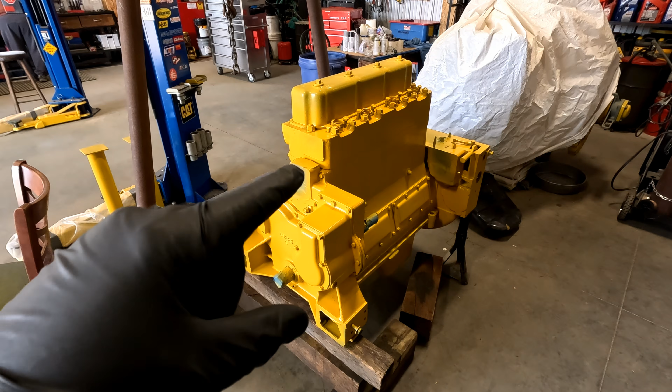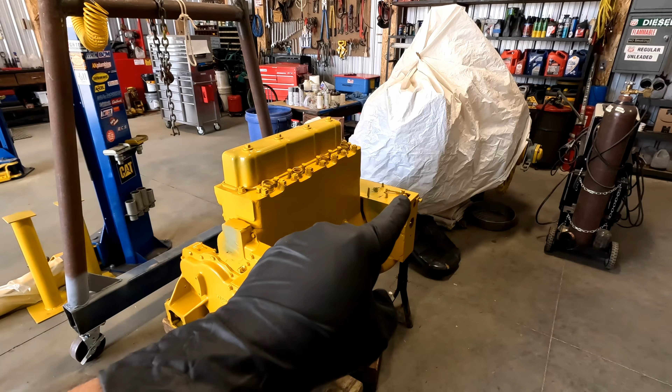We feel like we're seeing an end to our hard work with this engine build. We got a couple more accessories to do and put together up on the bench, and then we'll be well on the road to putting this on the rest of the tractor. Today, we're going to work on the lift pump and the fuel tower.

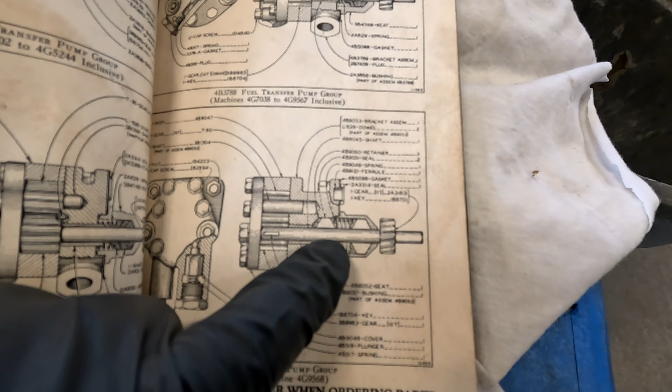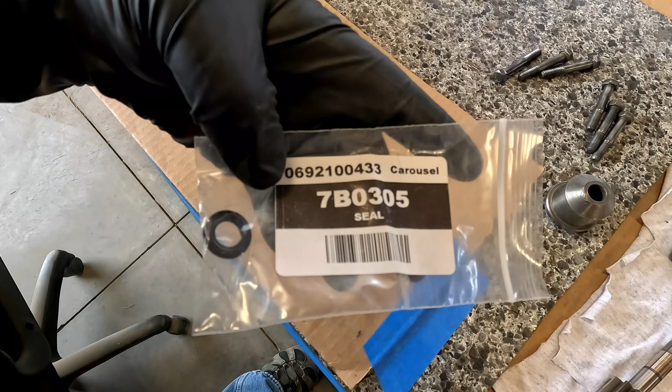We're rounding up parts because we're going to start on the lift pump first. I'm going to round up these seals first. It takes two of them. They're the 4B9051, and that's the packing that goes on either side right here. I need a 2A3314 seal. And that part's been upgraded to a 7B0305. We're just putting a few finishing touches with some Scotch-Brite and clean some of this stuff up. And we're ready to put this together.

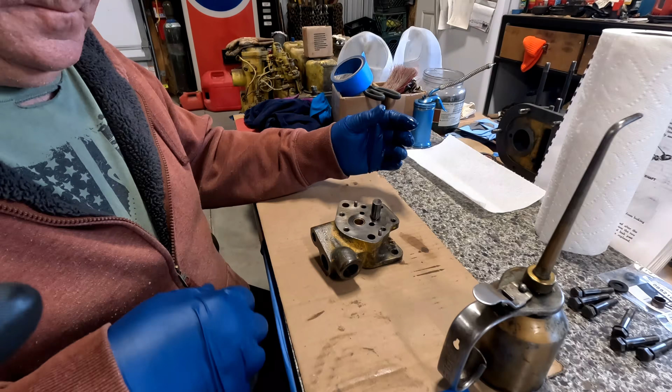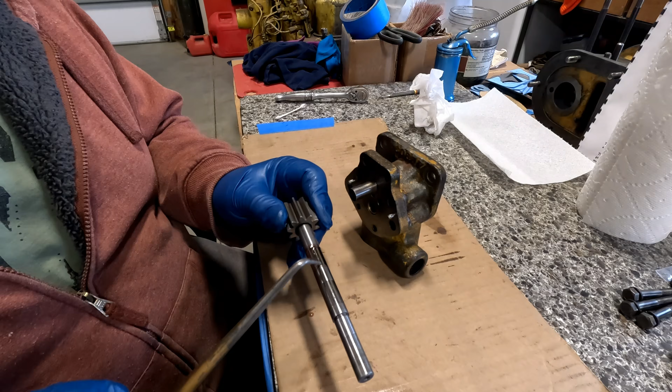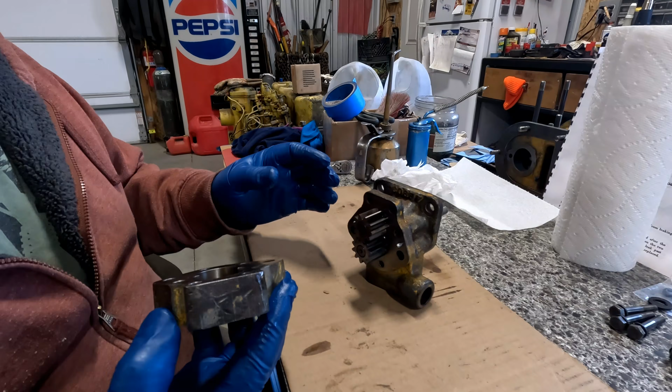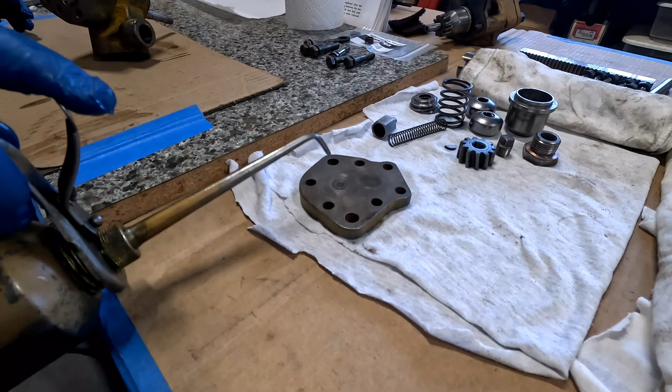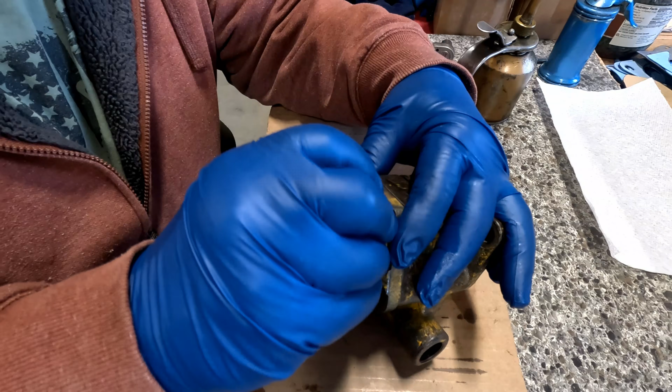There we go. What do you got next? Now the main body. And you can't reverse this. It's doweled in here, so it only goes one way. And there's no gasket in between it. These are a machine surface, and they fit very tightly. I put a little oil in those bodies. Now our cover plate. I'm upside down here. There you go. And a bolt. And we got new lock washers on all those. New split lock washers, grade 8s.

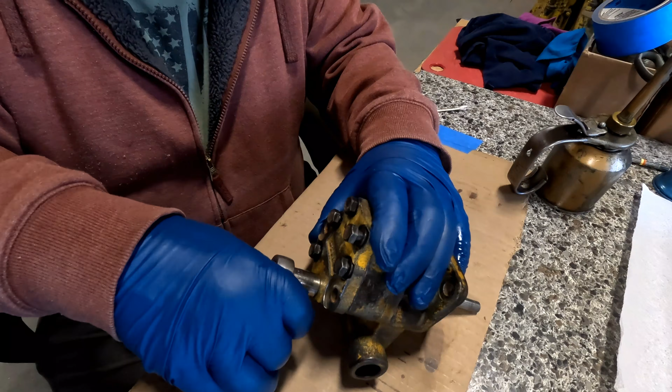And Dad's going to say that these are torqued by 1.5 grunts. Yeah. He's pretty good. He hits it very close doing it by hand. It's kind of become a competition we do.

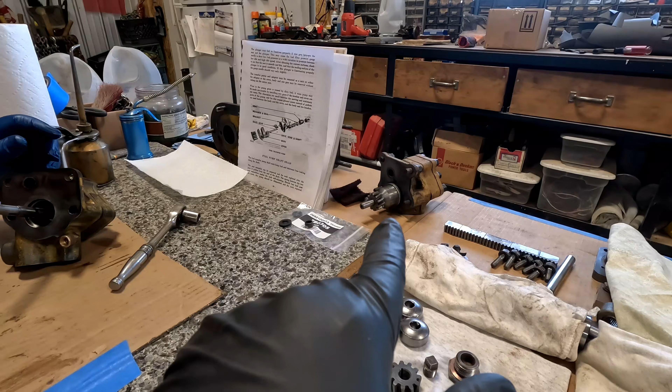Over here to the business end. Yeah. And this is where the packing and everything's going to go. Caterpillar had numerous different types of these lift pumps. And for example, this is 4G. That's off of a 7J. And you can just see how drastically different they are immediately. And even in the book, there's pages and pages of different lift pumps in here.

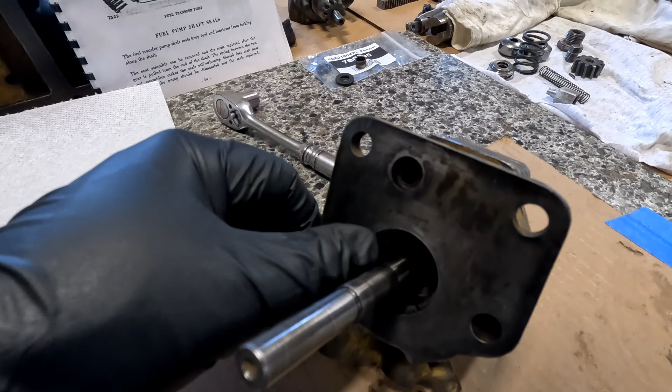We thought we had everything in order here, but we forgot to do something. This is a little bit of a complex part because this gasket we need to make here actually goes up right to the edge of this hole here. And this seats over the top of the gasket, like so. So that gasket will be right underneath of there. And to compound everything, this is kind of offset a little bit. So it's not in the center.

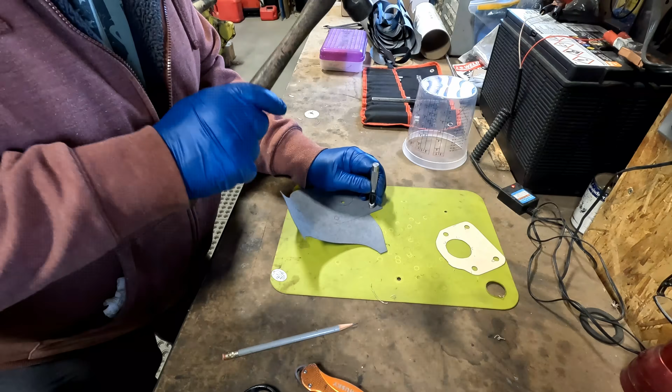So we forgot to make a pattern for this before we put everything together, but we're getting it. And we know we have another hole to do up here in the top, but we'll get that after we get it on the pump. I'm a little bit snug. Snug is good. We can always trim it.

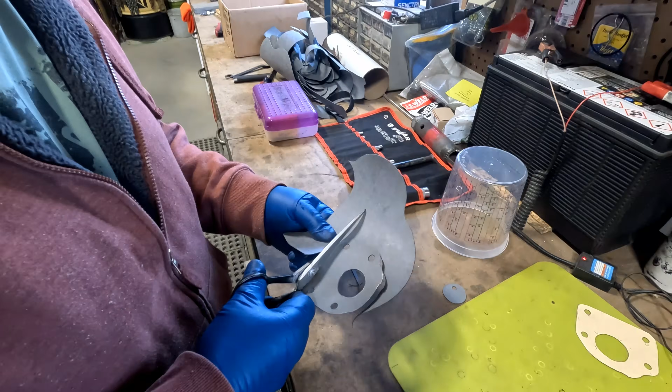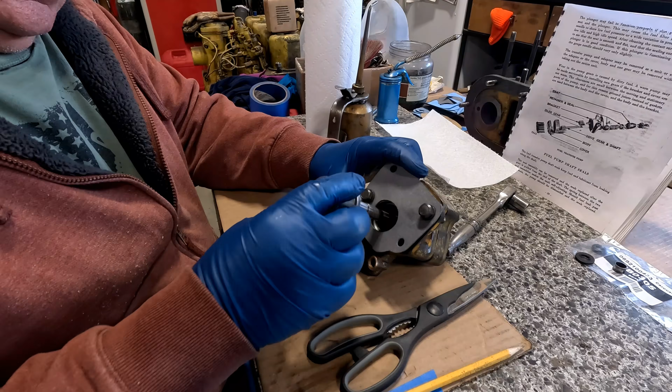It's Arts and Crafts Day here at LAOL. Yes. I think the art teacher would give you like an A-. Probably a B. A B? Yeah, maybe. Gonna work? I think so. It'll work. Fits in there nice and snug. I know Dad has three favorite tools at least around here. Number one being the torch, number two being the needle scaler, but number three is what? My favorite gasket making hammer. Yeah.

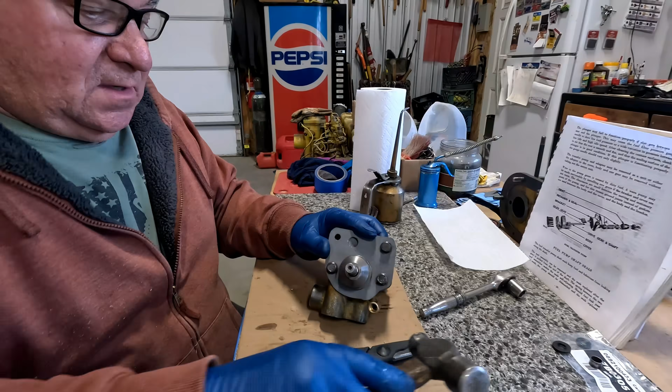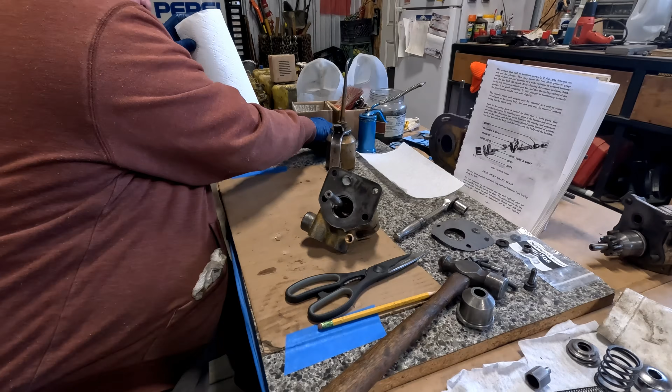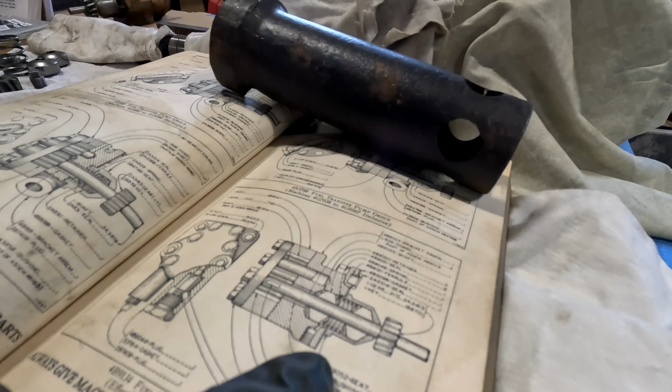Yep. Gasket goes next. And then everything else goes together because this has to go on the outside of the gasket. It actually shows that in the parts book here. Right here you can see that housing that comes out, and it actually dead ends right there, and then there's the gasket you can see right there. The retainer, that goes in there next, with the cup side up, just like that. And then your seal, which is kind of like a packing, goes on there next.

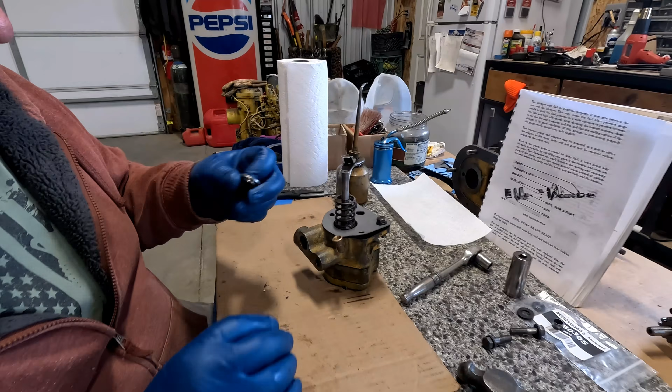And that's kind of... Yeah, that's going to be a little bit of a press fit. It's supposed to be tight. Yeah, it's tight. We might want to take a socket, and we're going to have to, I think... Well, we'll put this other retainer on there next, so we can push it on with that. There it goes. Next, the spring goes on, and then that cap with the dish upwards. Then we got another one of those seals.

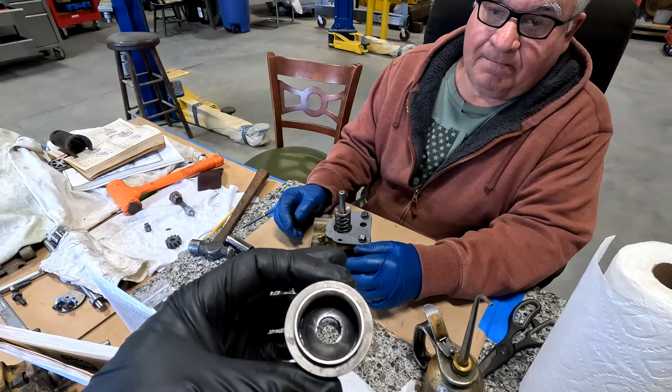Probably. And then our cap. Those seals and packings are self-adjusting. The spring keeps tension on them. If they start to leak, the book says to pull them out and replace them. What keeps tension on it is this collar, which will seat in this groove in the fuel tower right here, and that'll hold the tension on it.

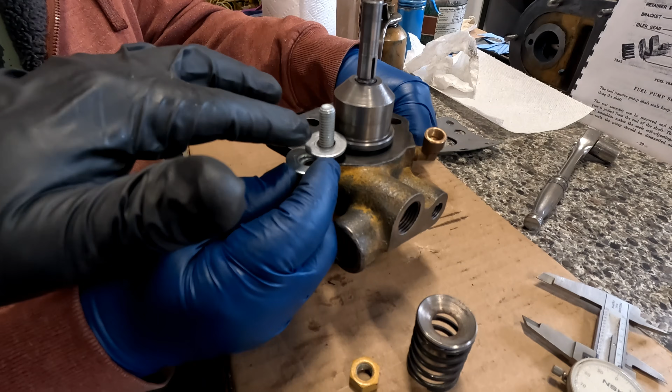I think our plan is just to put one bolt in here. We'll put the spring, everything together, press it down. Then we're just going to put a bolt through here and a washer that's going to hook on the side of this and tighten a nut down to hold it temporarily until we can get our gear pressed on here to hold everything together. And then once you put it on the fuel tower, it will compress this into a machined area.

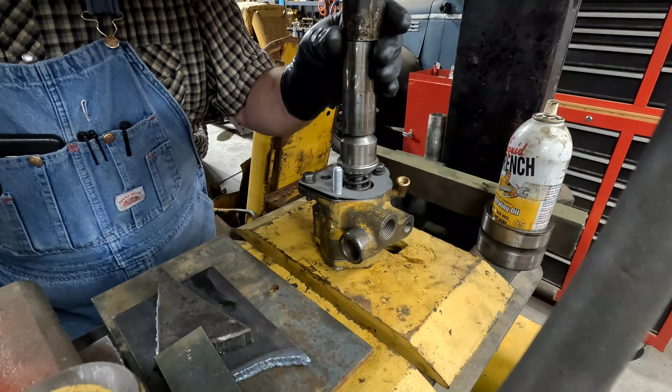Yeah, that's where it's supposed to be. Okay. Did you bring the wrench? I don't know that I'm going to need it, really. Probably not, if you just have it down tight. We'll back off slow and just see if it holds it down there. Think it's going to stay? I think so. Try it. All right, here we go. Gonna have to go more. There we go. All right. It's going. Is it looking good? Yeah, pretty good.

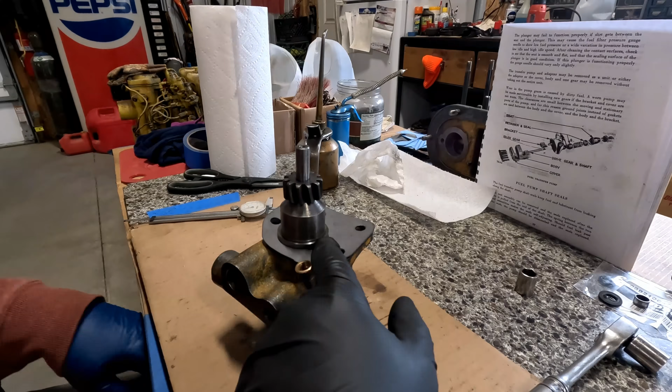That gear will get to a stop. Yeah, I'll feel it here. There it is. Now we got to take our nut off. It's got a little spring tension in it because this isn't together. The gear should hold that on there. There we go. See, it worked. Spring tension kind of pushed that off, but that gear holds that in place. And when you put this into the housing, it's going to compress it again. And for demonstration, this is a one-off of 7J, and it's the same exact way.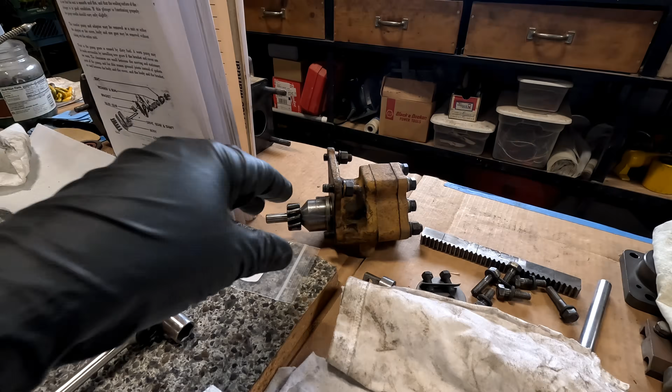Next, we got the pop-off, which is if the pump's not using the fuel that it's sending, it opens this up and lets it bypass. So that goes in there next. Then the spring. And then the cap. And that's 1 1/8 inches. Got the copper ring in there to seal it as well. There's a little plug that goes in here. We're going to put a little of this sensor safe thread sealant on there so we don't damage the sensors on this machine.

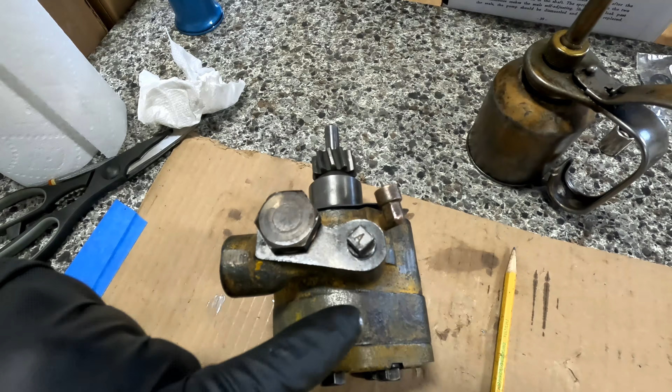Dad managed to get that sealant on everything. The more I tried cleaning up, the worse it got. And this plug is definitely not 3/8, and it's definitely not 7/16. It's definitely a crescent wrench.

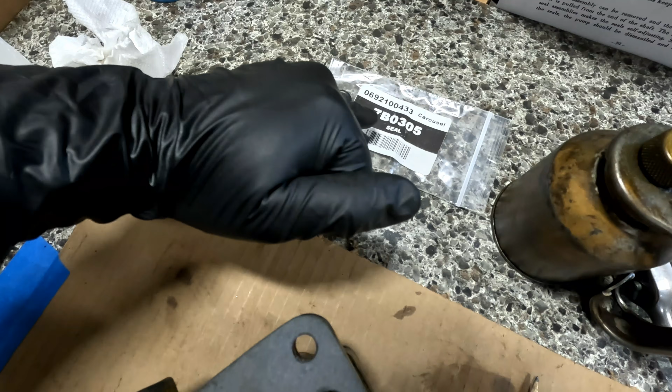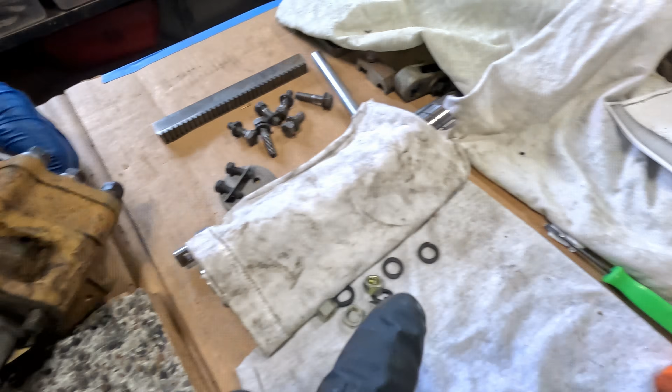Next step, I have the O-ring. This is the old one. It's mashed solid, but the new part number is a 7B0305, and this ferrule goes in here, and that O-ring goes around that ferrule. So this still has the gasket on it right here, you can see, and that O-ring was sitting on top of the gasket. That's also how they show it in the parts book. So this O-ring is going to go around here on this ferrule. I got it around the ferrule. Now that'll seat in there.

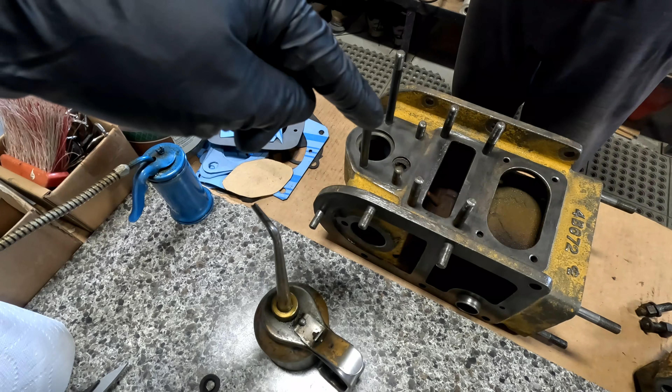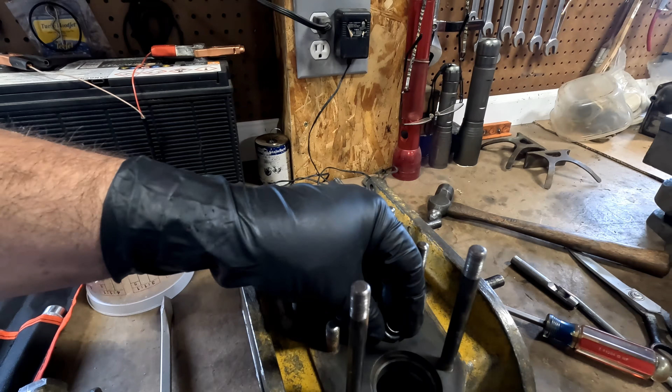I think we're going to go ahead and put this on the fuel tower so we can get it ready for paint. You got to hold a lot of things together. Yeah. Gaskets, and that ferrule wants to come out of there because the only thing that holds all that together is that O-ring itself. We may have just been a little bit paranoid here and took it back off out of precaution, but I think it's going to self-align somewhat, because if you put that O-ring on the ferrule and then put it on there, it really can't go anywhere else. We're going to let gravity help us here. It should self-align relatively easily. The tolerances on all this stuff are very tight.

We may or may not have to take this off again to get the gears to mesh up where it attaches to the governor, but we'll cross that bridge when we get there. We're down to the point that that spring tension is holding it up just a little bit, so we need to tighten it down. We're going to put the covers on and go ahead and put this fuel tower together.

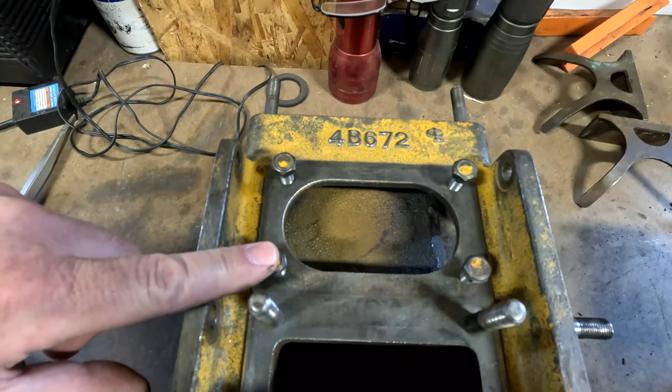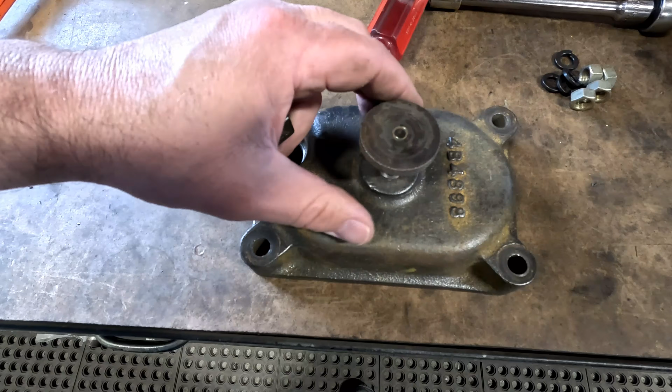I've actually found a Cat gasket for that one, and that is a 2A3356. Now, I didn't find one for this one, and that's probably because they changed these drastically when they went to the other disposable fuel system. And this one has a cast iron cover that's raised, and I'm guessing they did that to give it a little bit more extra capacity. The gasket maker extraordinaire is going to make one over here. This is the cap that goes on the top of the fuel tower. So Dad's going to make a gasket for that as well. Got the gasket Dad made for this, and here's the cap. Let's put it together.

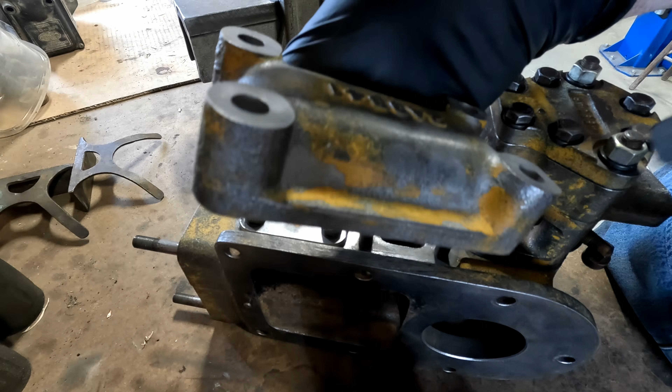Yes, I know I'm going to have to get in here later to hook things up to the governor. I know that, but this way we can kind of get it painted and get it painted with everything together.

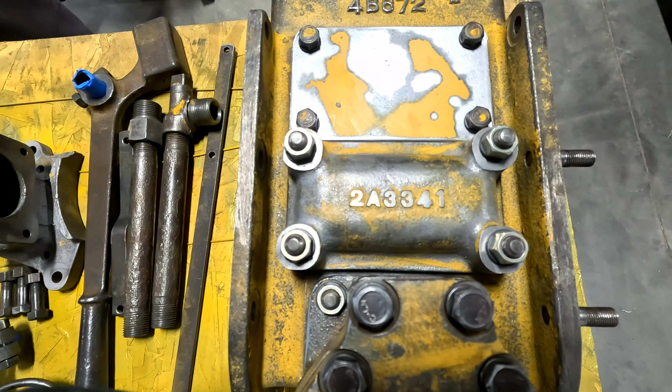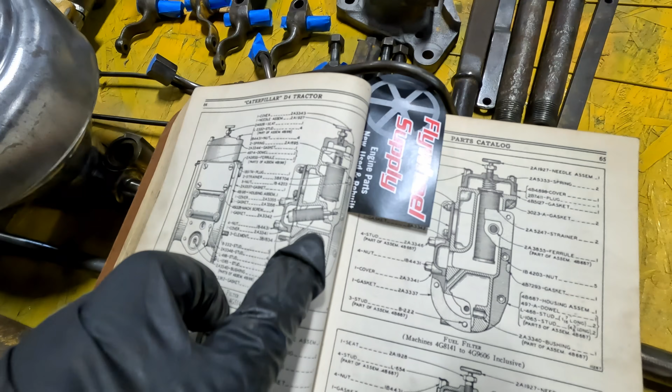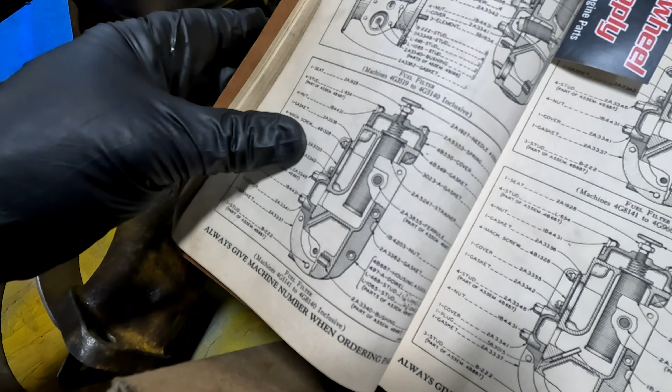I wanted to note another reason for this raised cover right here is an earlier feature on some of the probably RD4s before they became D4s. Right here, they actually had a smaller screen above and another screen that went through below. And it looks like they did away with that at 4G8141 and just went to the screen similar to what we have over here. And they just left that feature.

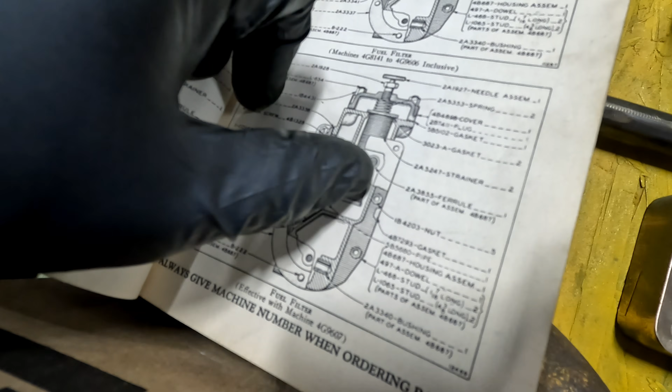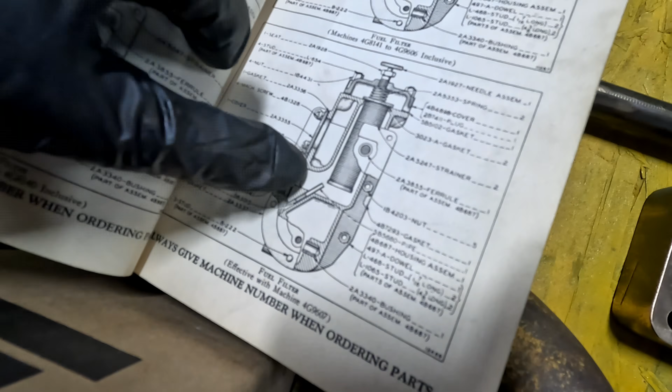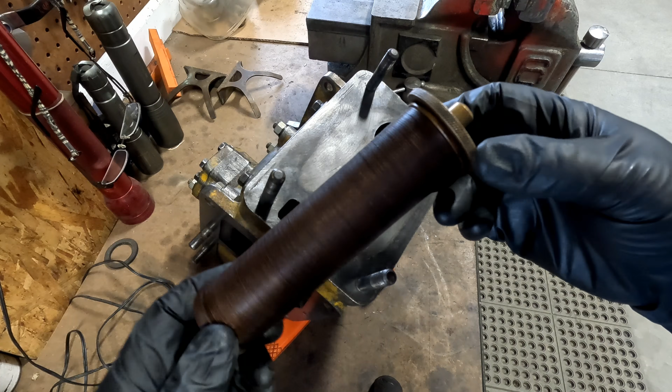That's also where the overflow goes and the fuel pump goes to pressurize the system and go through the filter. But you can also clean any large debris out by removing that cover that may accumulate in the bottom of the filter housing. This is the top of the fuel tower, and in these two compartments are spaces for what is a cleanable brass and copper and maybe bronze fuel filter.

And what this is, is a very tightly woven spring coil in there. And the idea is that these could be placed in here. Fuel could flow through them. There's actually a gasket that goes around the top here, Dad's making right now. And you would pull these out. You could unscrew them, and the coils would open up, and you could clean them out. You can see down here how they're kind of opening up a little bit.

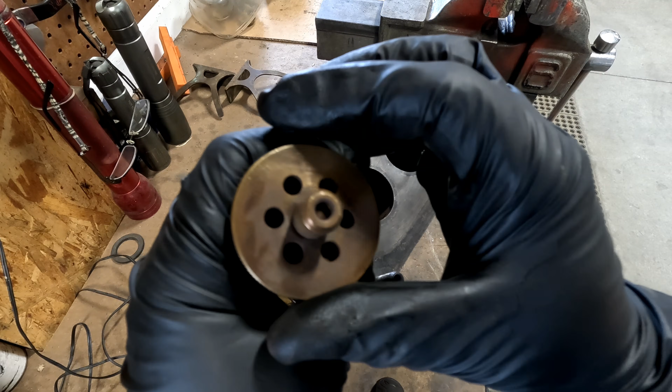Up in the very top, you can see there's some ports up there, and they can be opened and closed by turning the top of this ever so slightly, so you could have more flow or less, and it could be regulated in here. And yes, there's two of these that go in there. You can see those ports a little easier now.

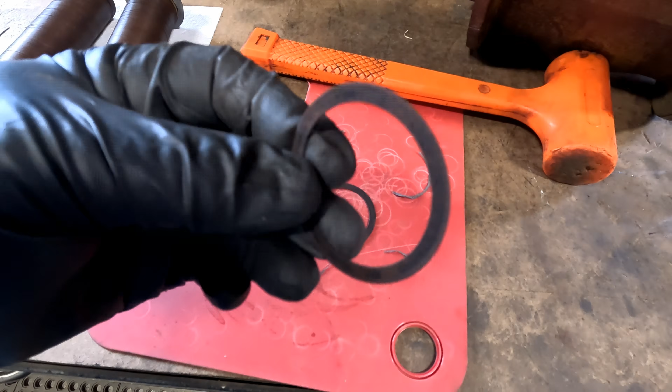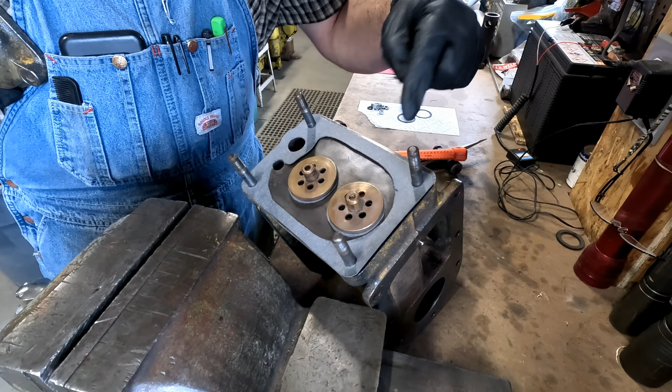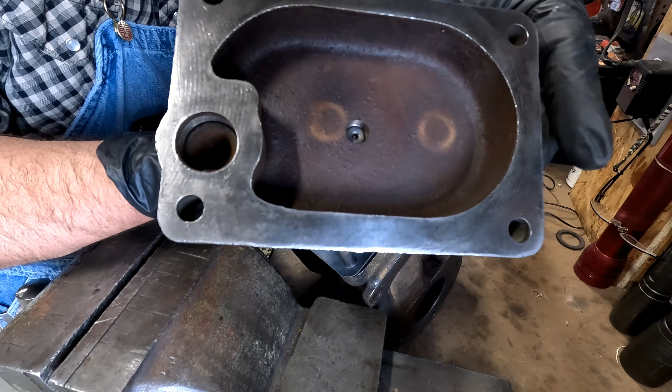These have this gasket underneath of them that rides up here at the top. We've just made two new ones. They're just a fiber, and we're going to hang on to these because these are unobtainium, but they're good patterns to make new ones. So Dad's got a gasket on here. Then there's two springs, and this spring pressure is what holds these filters in here. And you can tell by the witness marks on the top of the cap, that's what holds the pressure in.

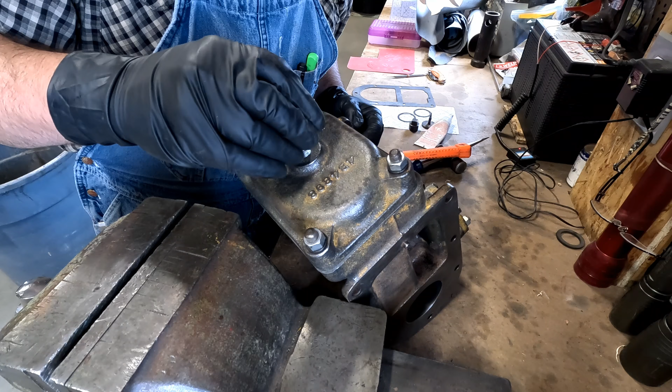This is the bushing for the bleeder that goes on the top. We've already taken it apart, cleaned it up, cleaned up the seat in there. So it's good. I put a little sealant on there. Here's your bleeder. There's a tiny port right here. You can see it from your side. When you open up this needle valve, it'll let the air out to bleed it. We're going to put the plug in here up at the top.

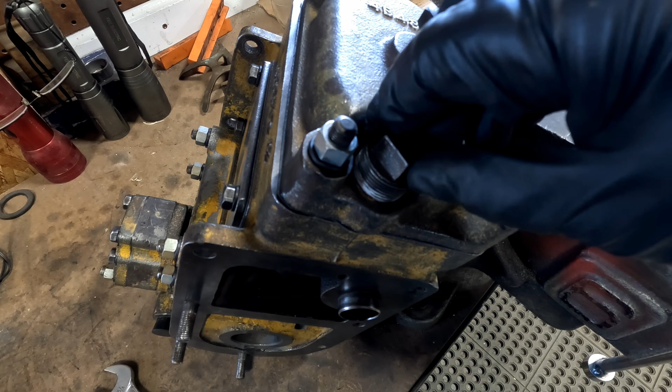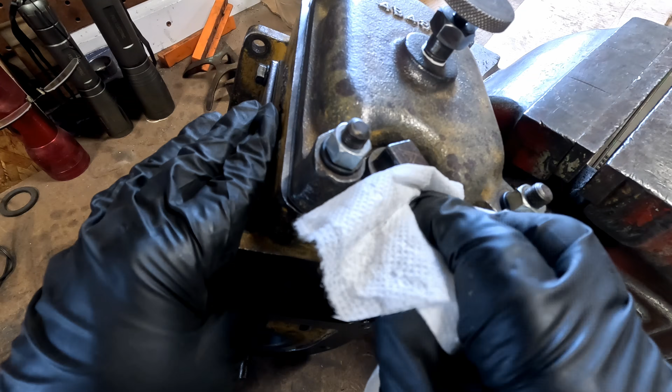I'm not exactly sure, but Dad and I think that this hole is here so you can stick a funnel in there and prime this whole system with some diesel. Well, that's done. Another part for the puzzle. And we can put it over here with the other stuff ready to paint.

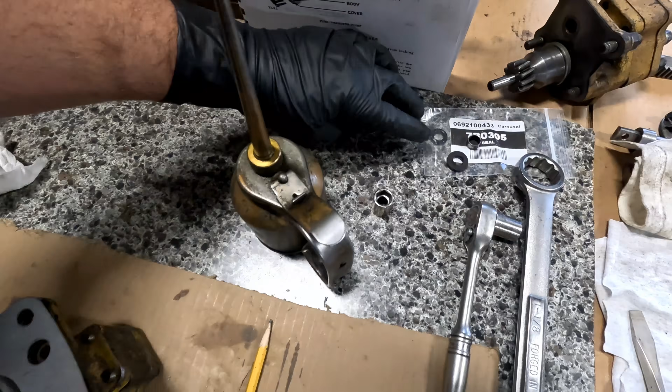Man, I don't know that that sounded good. You have Caterpillar hardware. Yes. This is the 7B0305. Next step, and we have the old ring. You can... I'm off today.